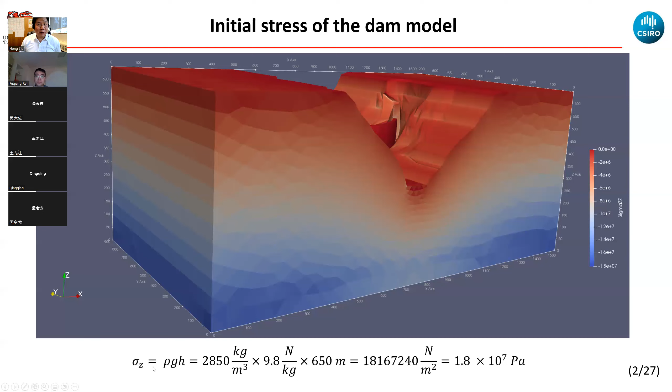But obviously for this problem, because we have the dam here, and the dam has a different self-weight, and we have the river valley here, you can see obviously there is stress concentration. If I zoom up to that region, you can clearly see the stress concentrations there. Okay, I will leave that to the end of my presentation for us to have a discussion about how we solve this problem.

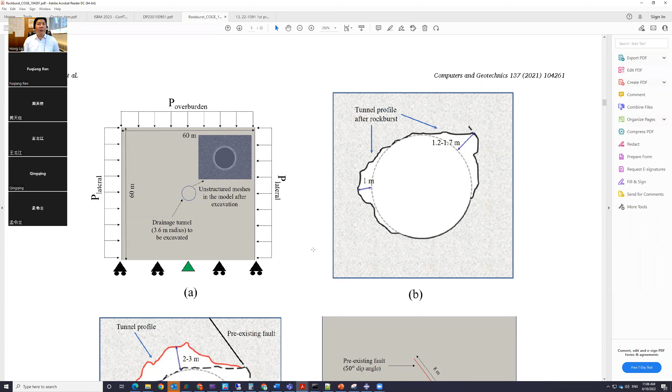Okay, so what I want to talk about today is rockburst. It's actually based on one of my PhD students' papers; I think I showed you this paper before. Let me show you the paper again. It was written by Dr. Han, who is now an associate professor at a Chinese university; he just graduated last year. The problem is actually in China, in Jinping. I think many of you from Dalian University of Technology have worked on rockburst in Jinping before, either using numerical methods or microseismic monitoring.

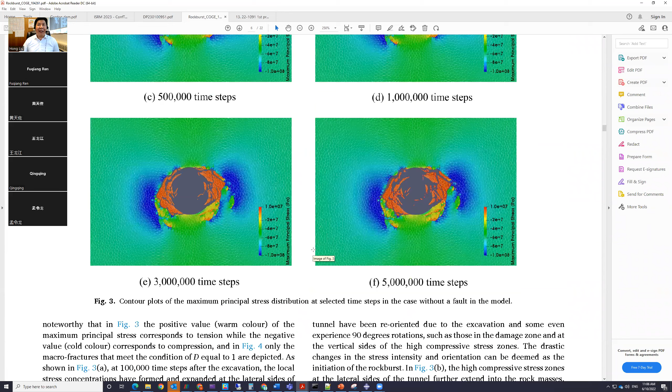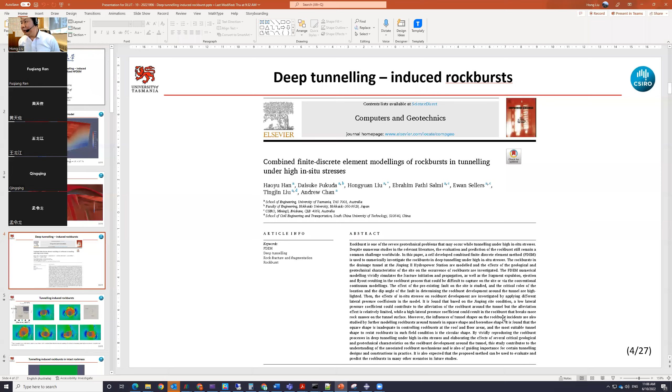Obviously this paper is quite comprehensive. We won't have enough time to introduce everything. We will only introduce the simplest case, a circular tunnel in massive rock mass. So we want to consider the geometry here. Okay, let me make my screen full screen again. So we will only consider the simplest problem. We consider the tunnel.

As we know, Jinping is situated in Sichuan province. This tunnel has an average burial depth of more than 2,000 meters below the ground, and there is very high in situ stress. We use the published paper from the Wuhan Institute of Rock and Soil Mechanics.

For that paper, we have the in-situ stress in the vertical direction of 60 megapascals, and the horizontal stress is 45 megapascals. So when you have that initial stress, digging a tunnel will introduce stress concentration, and this stress concentration will introduce failure.

Here I've taken a few steps from the numerical modeling, so you can see how the failure process looks like, like if we are without joints, or if we have adjacent faults there. Obviously, the adjacent faults have an important influence on the rock bursting.

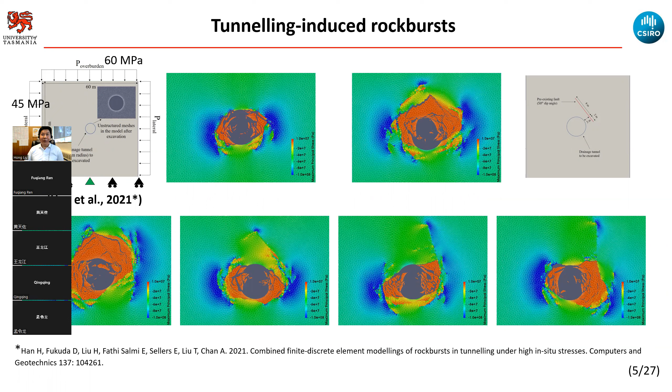So here this is a video which shows the numerical simulation. You can clearly see after that excavation how the damage occurs around the tunnel, and then after that you will have blocks fall off from the tunnel. So that's what we usually call rock bursting.

For our case, we have the vertical stress bigger than the horizontal stress. You can see the stress concentration is mainly around the two sides of the tunnel, so then you have the majority of that failure around the two sides, for the case of massive rock masses.

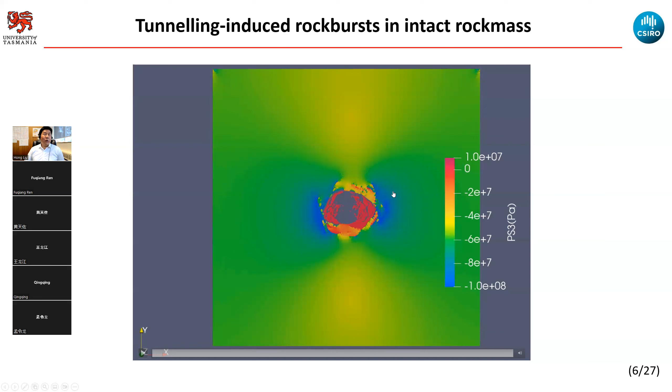But for the Jinping tunnel, according to the field investigation, we have adjacent faults or joints there, and in that case the majority of the fallen rock block is actually from the upper right corner.

In that paper, which we won't really talk about today, we considered the effect of the fault location, and different locations will influence the rock bursting behavior.

Obviously, from the numerical simulation results, we can base on them to do some parametric analysis, some quantitative analysis, and mapping to see what is the excavation depth.

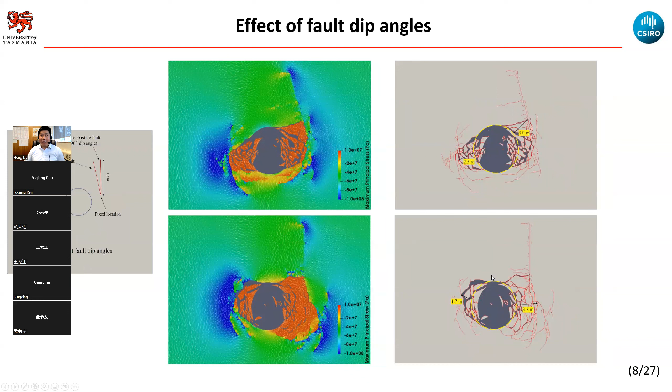So this is what this figure is showing. And if we have the fault with a different dipping angle, that will influence this as well.

For what we simulated in the Jinping case, we have the vertical stress bigger than the horizontal stress. You can do a series of parametric analysis. So you define a lateral stress ratio, using the horizontal stress divided by the vertical stress, giving the lateral stress coefficient, K.

If you adjust K, the result will be different. If you have K equal to 0.1, since K is the horizontal stress divided by the vertical stress, that means the vertical stress is much bigger than the horizontal stress, which explains the damage on the two sides.

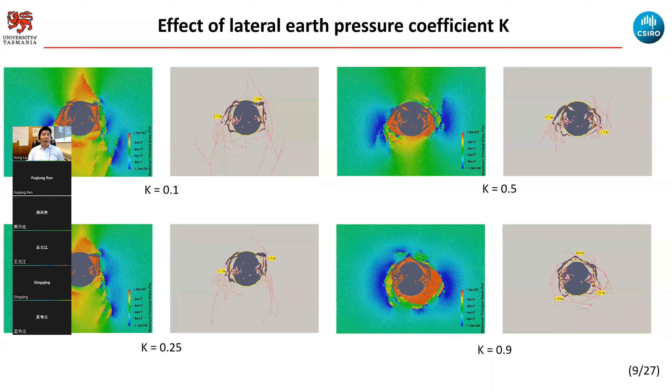For this case, if you change the tunnel shape from circular to square, or to a horseshoe shape, you can see the tunnel shape has an important influence. In the worst case, if we use a square tunnel, we're introducing bigger excavation damage. For the horseshoe tunnel, at the bottom, we're introducing significant stress concentration as well.

The stress concentration is causing a measure of the stress-induced failure. We know that for deep tunnels, stress-induced failure is important. If we have a shallow tunnel, structure-controlled failure is more important. So this is the problem we've stated.

How can we model this problem, and specifically how do we use our software? We use HFDEM to model this problem. So this is the task today.

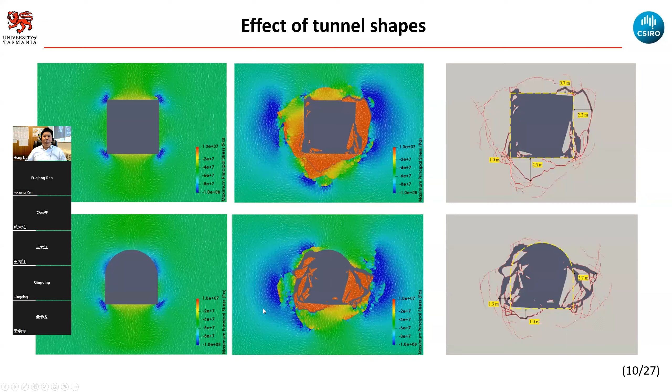To model this, I will introduce that we're using the HPC version, instead of using the GUI version.

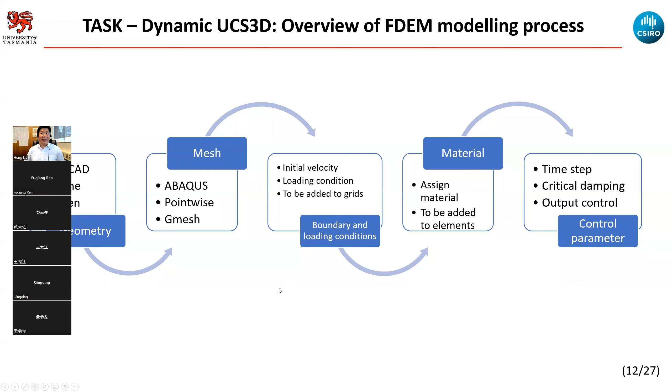For the modeling, we will still follow the same steps I've introduced many times before, so I will not go through that again.

For this problem, which is different from what I introduced before, unlike previously where the sample is initially stress-free - no matter if we introduce a uniaxial compressive test, a Brazilian test, or dynamic UCS and BTS, in all those cases before we add the load, we know it's completely stress-free.

But for this case, we model it differently. Suppose if the rock is stress-free - if you excavate it, it won't cause rock burst. So the important thing here is that you need to represent the in-situ stress, which we call the geostatic stress. If we use ABAQUS, that's called the geostatic stress in your analysis.

What we consider here is rock mass - 30 meters by 30 meters, which is a big scale problem compared with the previous laboratory scale we introduced. There, the sample was just a few centimeters, like the typical UCS test, with a diameter of 54 millimeters and height of 2.5 times 54.

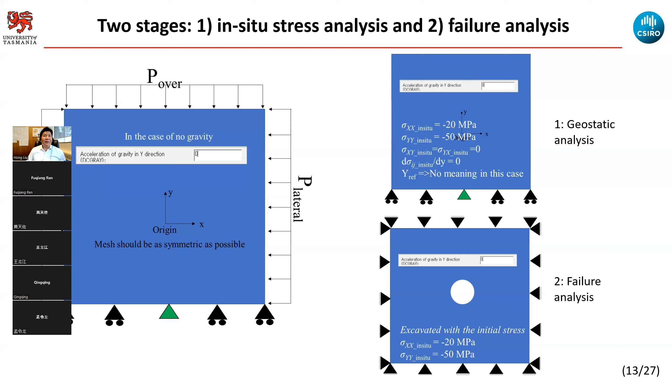For those cases, we need to use what's called dynamic relaxation to consider that as a static problem. In that case, you need to use the so-called critical damping. That's quite slow, so we introduce a new method here, or not really new since it's implemented in many software. For example, in the famous geotechnical software, we know that's implemented in ABAQUS as well, with that flag available.

Here we do not have geologic stress, or what's called tectonic stress. What we consider is only the self-weight. For this, we can easily use the formula rho*g*H to calculate the vertical stress.

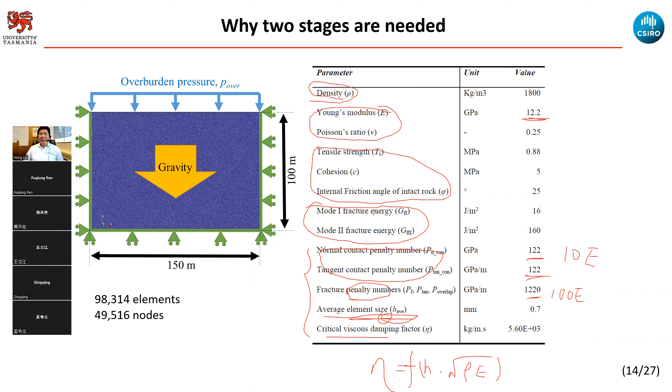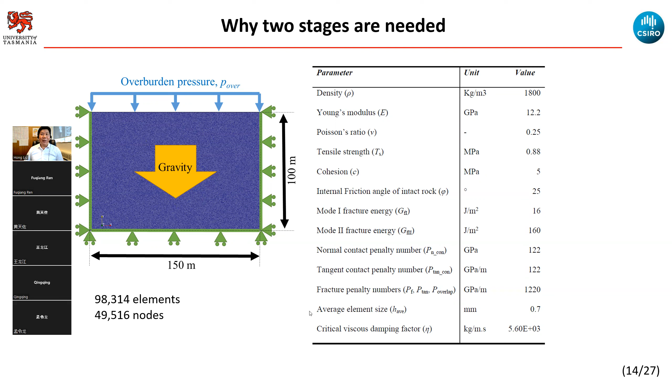Okay, so this is the case. Suppose we use this case to get the geostatic stress, or the initial stress caused by self-weight only. We can get the stress distribution. At the surface, the vertical stress should equal 0. Then at the bottom, we should have rho g multiplied by H.

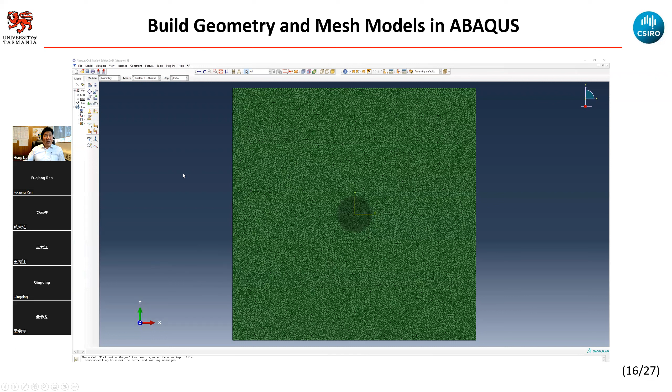Okay, so this method is calibrated against a simple problem, against the analytical method. So now I will apply this to a more complicated problem, the problem we are studying here.

First, to model this problem, initially we build the geometry. You can build the geometry using any software. According to what I have been doing, I use Abaqus to build this geometric model. But it's not necessary that you must use Abaqus.

For my PhD student, what he uses is ANSYS to build the geometry. No matter what kind of software you build it in, what we need to use is the mesh connectivity data file. Okay, so for that one, let me exit my PowerPoint presentation.

Okay, so let me show that in the input file. Obviously, before this presentation, I already prepared the input file. Similar to the previous presentations, I will share this input file with you after the presentation. All of the previous input files are now available on the computer. Okay, so this is the file which I prepared.

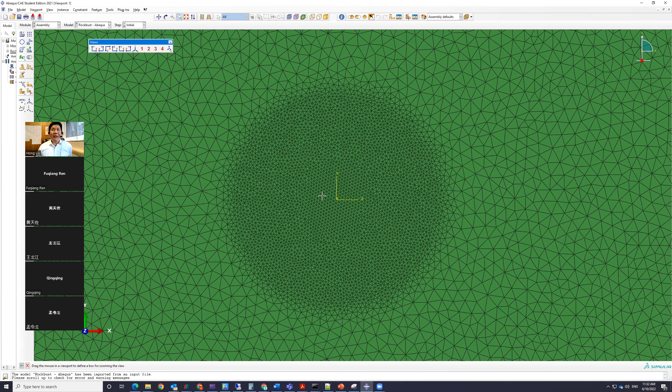Okay, so in this, I defined a few sets as well. That's for later, for me to apply the boundary conditions. Let me show you the sets. You can see which are defined as sets. So what is in the set? Let me highlight this one. So I define the boundary. I have the bottom boundary.

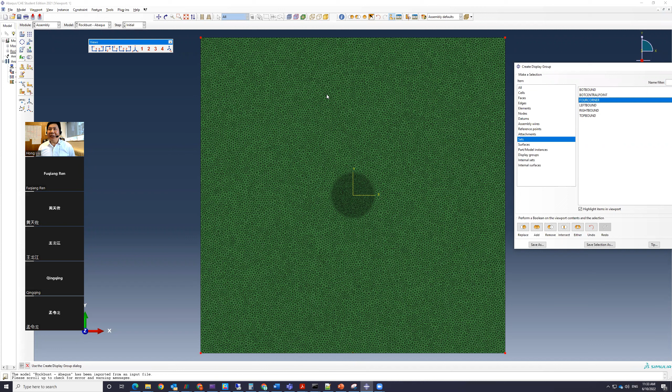Here I define one point, the point in the center of the bottom boundary. Here I will apply different boundary conditions later. Then after that I define the four corners as well. Then I define the left boundary, the right boundary, then the top boundary. So this is what I implemented using Abaqus, or you can use any other software. Then let's come back to the presentation.

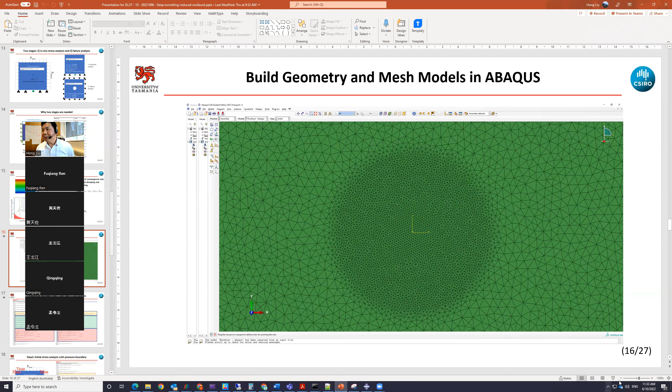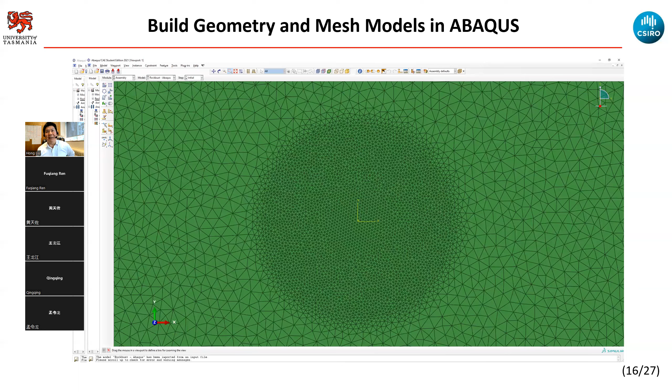Let me swap my screen. We build the model. If we have a close view around the tunnel, it looks like this. This is the part we need to focus on. What we do is apply an initial stress. We divide it into two steps. In the first step, I need to apply the initial stress, and in the second step, I need to do the failure analysis.

Then here is the running control of the input file. As I said before, we need to use the HFDEM software, so you need to have two files: one is the mesh connectivity, and the other is the running control file, which controls how it runs. Here, it's particularly about this section. In all my previous presentations, I skipped this one since it was not related to those presentations.

Okay, so this time I will specifically talk about this parameter, which controls how we apply the geostatic stress, or the in situ stress. Let's go through this. In the previous models, I always asked you to set this to zero. Zero means the model is initially stress free. If it's zero, you can ignore all of the parameters here. For our case, we need to have the initial stress.

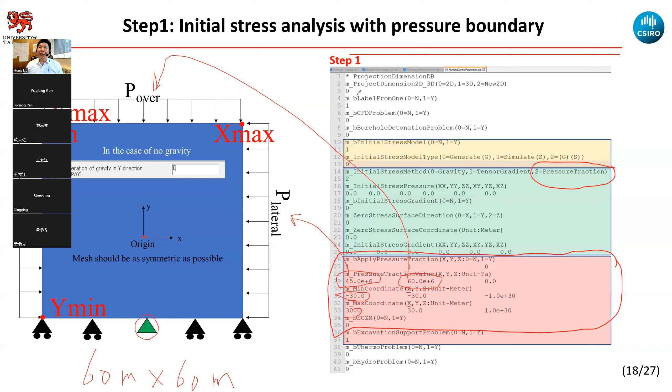In this way I will be able to build the in situ stress. Obviously for our software this is not the only way; we can use other boundary conditions as well. You can use this kind of boundary condition: you fix the middle point, and then for the bottom boundary and the left boundary you use a roller boundary.

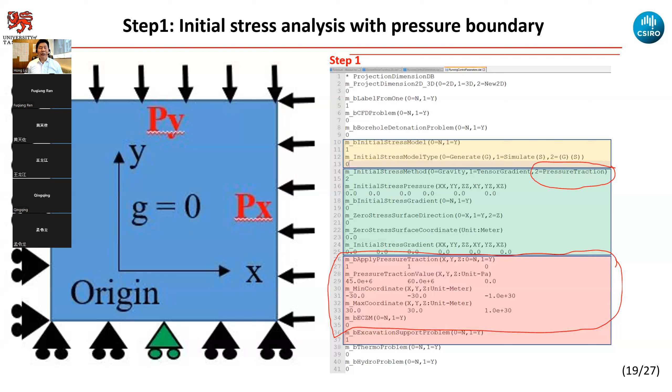For the bottom boundary, you do not allow vertical movement. That's why when you apply your surcharge there, the stress can build up. Otherwise, if you do not fix this boundary, the stress will be released. And this boundary you need to fix in the horizontal direction, otherwise the stress is released. No matter which boundary you use, you will be able to get the in situ stress.

Okay, as I said, we have another way to apply the in situ stress. First, in the calibration example, I use this type of boundary and I apply an in situ stress. For this one, you can apply the in situ stress, or set it equal to 0, like in the calibration. This slide demonstrates that here.

If you use stress tensor, you need to give the sign as well. The sign convention is that compression is negative and tension is positive. Here we put in the stress, which is 50 megapascals. Here we give the stress tensor.

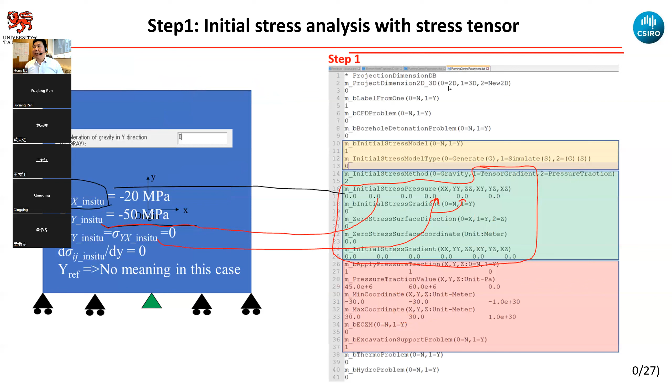Okay, let me clean my computer screen. So that's the first step, we use this kind of boundary condition. Then in the second step, we need to change the boundary conditions. All of the outer boundary, we fix it. Then for the corner, we fix it the other way. This is one kind of boundary condition. You can also use this kind of boundary condition.

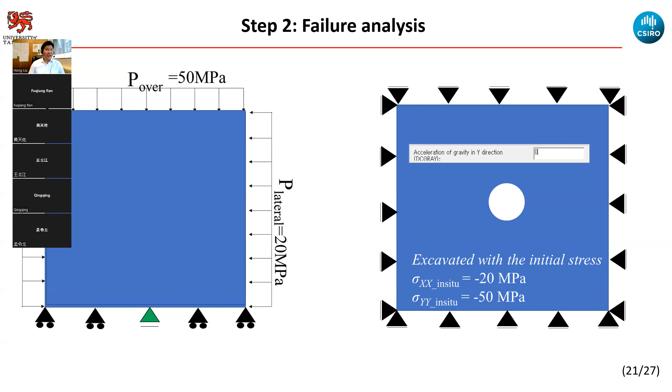But when you use this kind of boundary condition, you need to keep the overburden stresses there, otherwise you will have stress release. And for this one, you can remove it, since we fix the boundary, making sure the initial stress wouldn't be released. Okay, so this is step one.

I have already prepared the input file, so I'll show you the input file, and I will give you the input file of this presentation. This is step one. What we need to use is here. For this one, when you run, you just need to copy this one to the exe file. Okay, to the exe file, I have that.

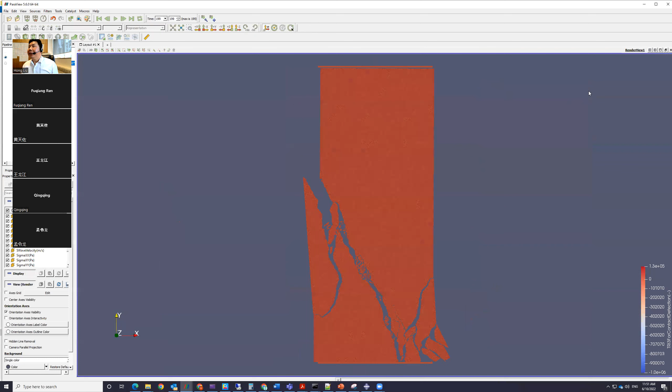In the visualization, I'll show you the calculating of the result. This is step 1. So for rock bursts, that's step 1. We can consider two cases: if we do not consider the self weight, what do you get? The in-situ stress.

So it looks like this. We can observe that the stress becomes uniform. If we go into the first step, you can see the stress there. Using this scale, almost everywhere is 0. Then it will quickly become okay.

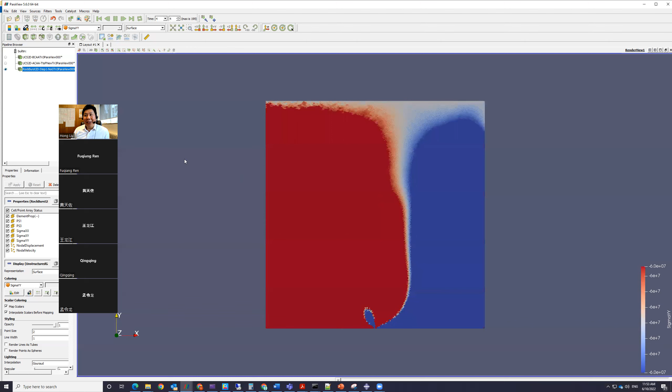Look at this process. We just run a few steps—you'll see it. Look at that again. Quickly it goes into the stress. Then finally everywhere becomes 60. So this is the case without the self weight.

Now consider it with the self weight. If you consider the self weight, then in that case you will have gradients, like into this one.

So what direction is the stress? I need to change the scale. So this is that. Let me check this one. Yes, so this is no gravity. So let's look at that with gravity, no gravity.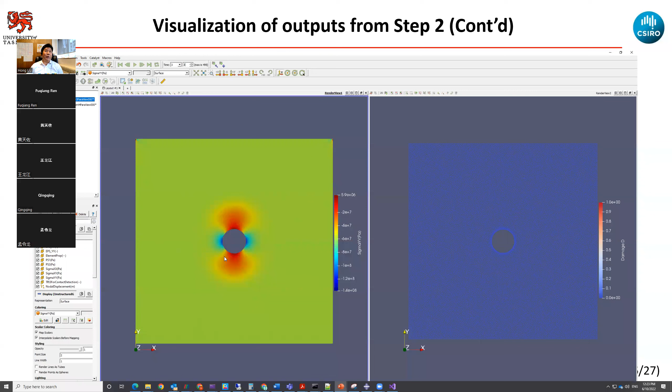This is the initial step, you can see here. This is where you only have stress concentration, you do not have any failure yet. Whether you have that in the calculation, then that's where I have the failure.

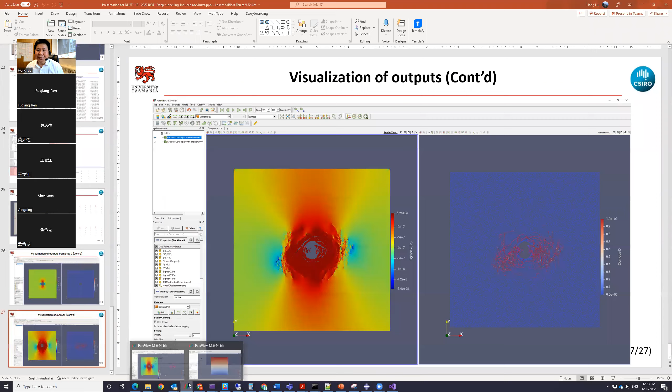Let me show you the results in the parallel view. I already calculated this result, so let me get rid of this one.

After the calculation, I need to demonstrate that. After that, you copy these two files into the exe file. I have that in the exe file here, then I copied that.

Then you just need to run that, and you get the results. Here, this is where I calculated the rockburst, that's in step 2. After that, I visualize the results.

So I go into ParaView. The rockburst is step 2, rockburst in step 2 of the calculation. Here, I have that on the left which will show the stress.

Let me show the joints as well, and for the right hand side I will show the joints. Here I will show whether there's damage or not, and for this one I show the vertical stress.

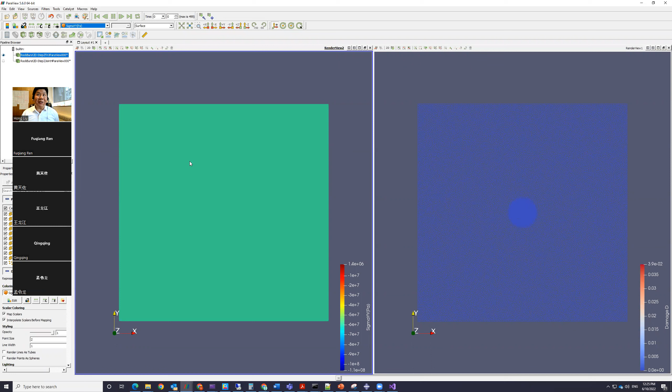After the excavation, which introduces stress concentration, the stress concentration is what causes the failure here. Since the vertical stress is bigger than the horizontal stress, this causes the stress concentration, and this stress concentration with the failure around the tunnel will further propagate into the tunnel, and you will have the stress concentration further go into the deeper part of the tunnel, which will continuously propagate, causing failure.

So that's the results we got from my PhD student, which they published in that paper. Obviously that paper is more comprehensive and did a parametric analysis, so I will leave that to you.

For this one, you can change it. We apply vertical stress of 60 megapascal, horizontal stress of 45 megapascal. You can change that to change the lateral pressure coefficient K. You can also add one of the joints here, and you can change the field of joints or the opening of joints, and change the geometry of the tunnel as well.

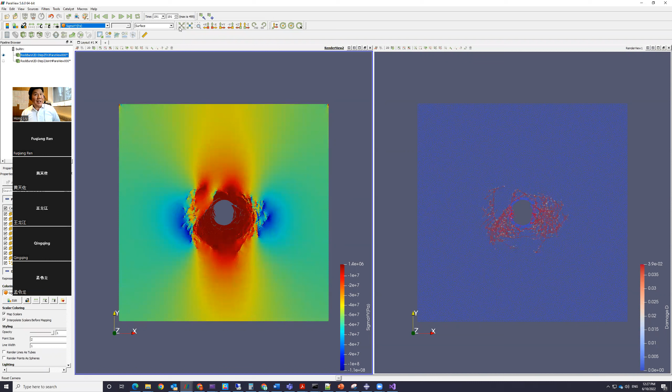So you can see for these cases, we have failure which is only around the tunnel. You have the majority of the part where you do not have that failure. So no matter whether you have failure or not, we always insert the cohesive element, and here we wasted a lot of computation capacity. Since you do not have failure there, it's unnecessary to insert the cohesive element.

So in FDEM, they have two methods to insert the cohesive element. One is what I showed here, called the intrinsic cohesive zone model, or ICZM. For these cases, no matter when failure occurs or not, I always insert the cohesive element. There is another method called the extrinsic cohesive zone model, where if you do not need failure, we do not insert the cohesive element.

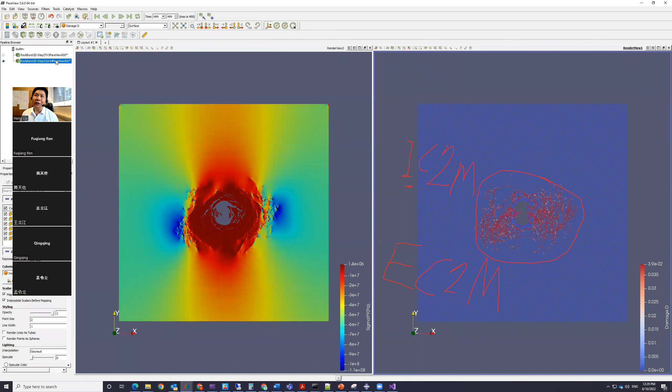Let me adjust this value. So we say the damage is from 0 to 1, only when it's equal to 1. So what you see in the cracking, when d equals 1, then that's the crack, which is smaller than this one.

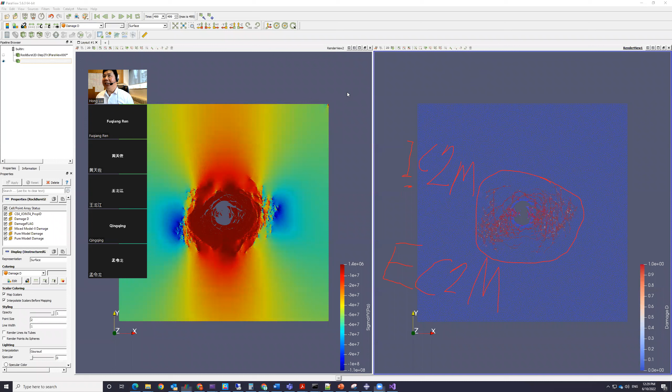Okay, I have another one here. I show that in the stress. Then here I show that in the joint.

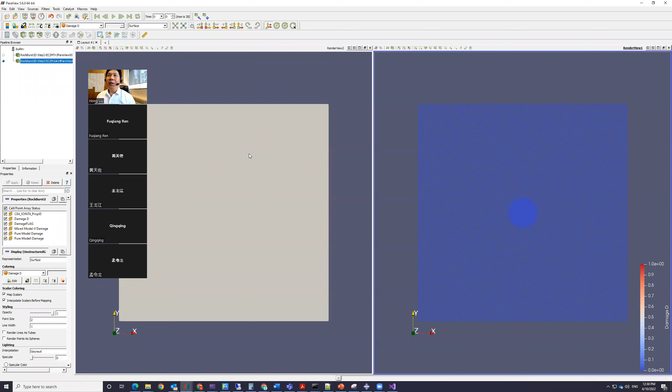Okay, so the rockburst ECZM. This one I show that. Then this one I will show in the joint. Then we show that in the damage. Let me find that in the ECZM model. Rockburst.

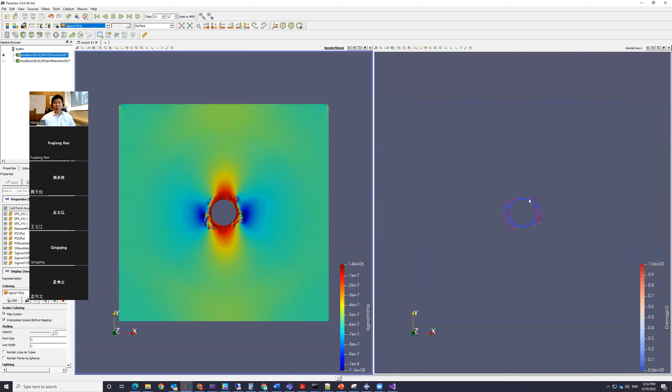Let me show this, that's in the damage. Then this shows the stress. Look at the difference compared with the previous video. You can see here, only the case when I have the potential of damage occurring, then in that case I insert the cohesive element. Unlike the previous case, where I insert the cohesive element everywhere. So that's called the extrinsic cohesive zone model.

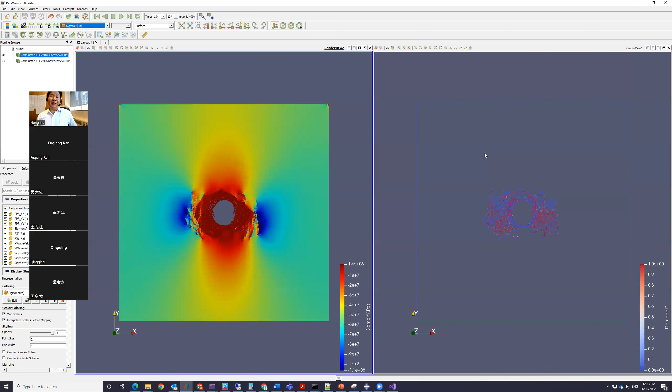If you're reading the paper about the cohesive zone, they have two models: one is called the ICZM, and the other is called the ECZM. ECZM is much more computationally efficient. So that means in this area, if I do not insert the cohesive element, it's unnecessary for me to deal with the cohesive element there, so we're saving a lot. You can compare the two cases, and they are almost getting exactly the same results.